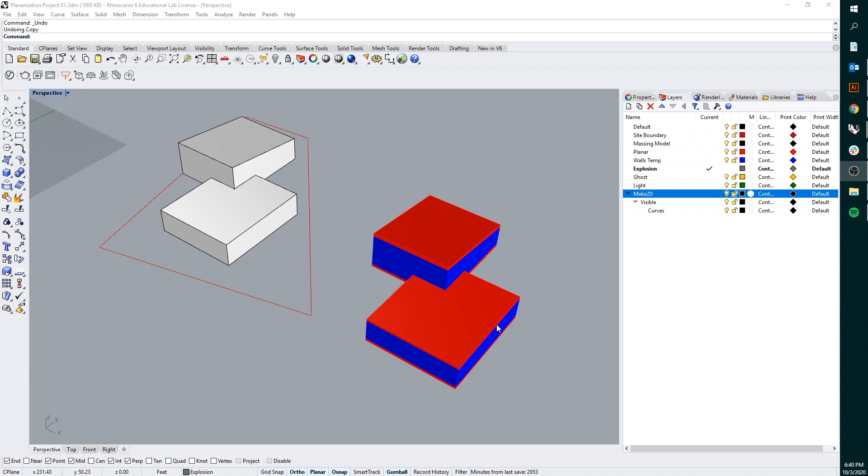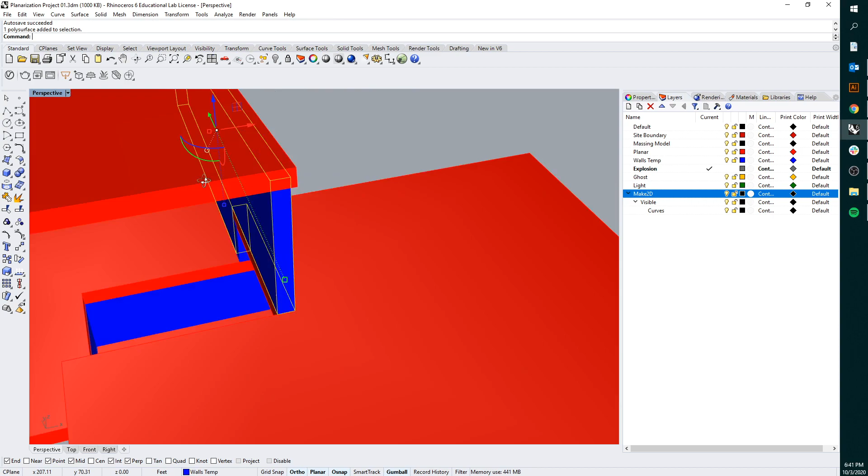The only difference in the model from last tutorial is that I added a little bit of information to clean up the model. This part goes into the digital craft portion of the grading, where if we think about actually constructing a model, we don't want this blue plane to come up to an edge here. We want the red surface to come underneath it to give us something to actually glue to, so I've added that information.

I covered this in the last tutorial as far as how to actually do this, but I've gone through and finished the model here. So I'm going to now work on the exploded axonometric portion.

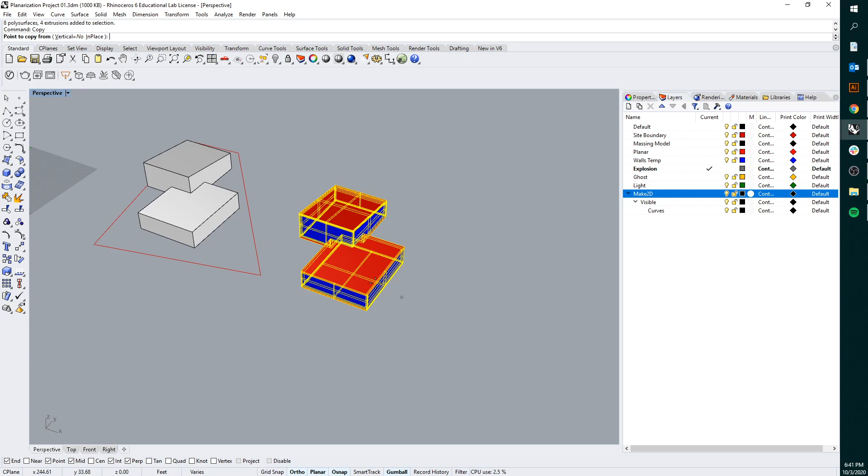The first thing we're going to do is copy our model over so we have one model that's just our massing - we can go ahead and delete the site boundary for now - one model that's our planar model, and one model that's going to be our exploded axonometric model. First we need to take the pieces apart.

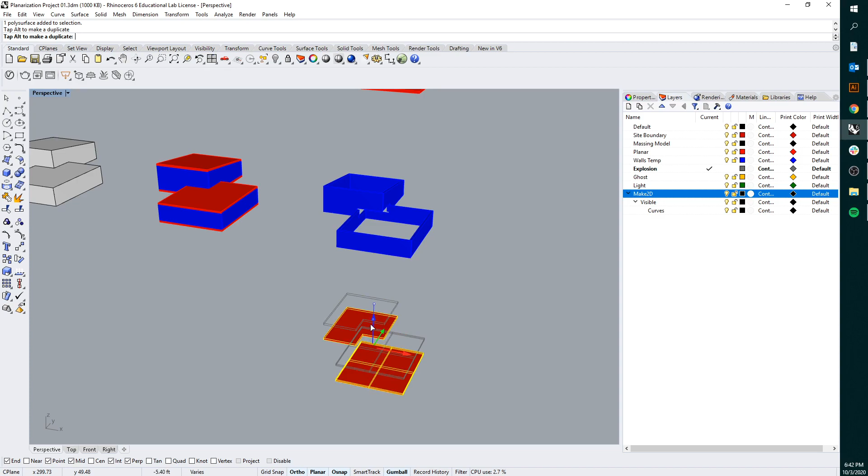I like using the gumball tool here. If you don't have the X, Y, and Z options, go to the bottom of your screen and select gumball, which allows you to move things vertically, horizontally, in the X and Y direction, and the Z direction. Here we're just pulling the pieces apart so they're separate.

Don't worry about how far they actually are from one another for now - we can always move them a little bit more later. I'm just moving out in the direction perpendicular to the face of them for now.

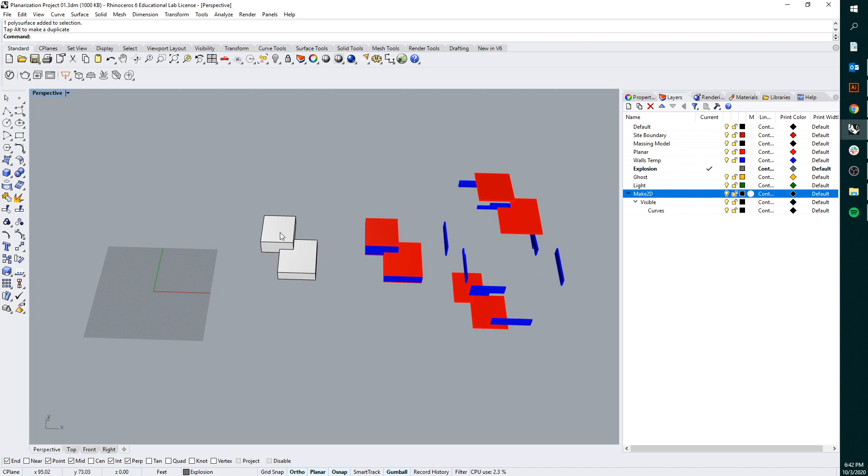Now we're going to think about how we're going to construct this axonometric. If we think about the basics of an axonometric, the first thing we do is rotate the plan, and then draw up from it. So we need to decide which portion of this we want to be the front of our model.

If we look at the front here, and rotate 45 degrees in this direction, this would be the front. If we rotate 45 degrees in this direction, that would be the front. We can also look at back views and things like that.

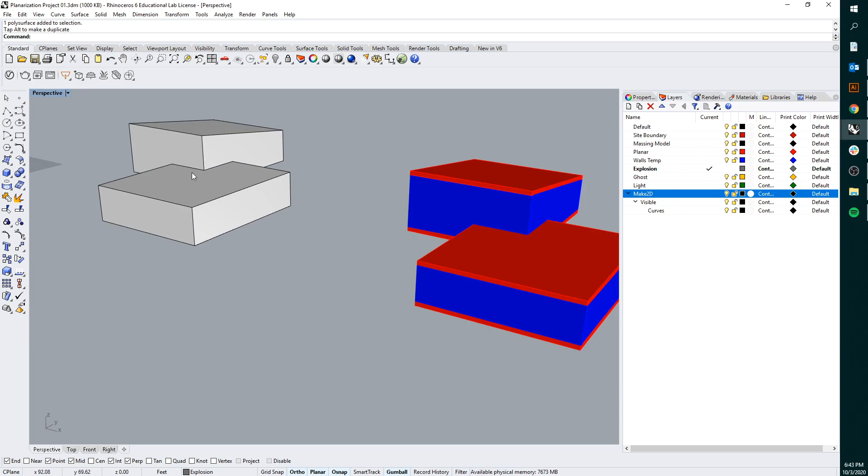I'm going to go ahead and take it from this view - you can take it from whichever view works best for your model. In this case, I think looking up the hill at my model in this direction works the best.

So we're going to go into the top view, and you can either use this part of the gumball or just do a simple rotate. Then you decide whether you're rotating in this direction or in that direction.

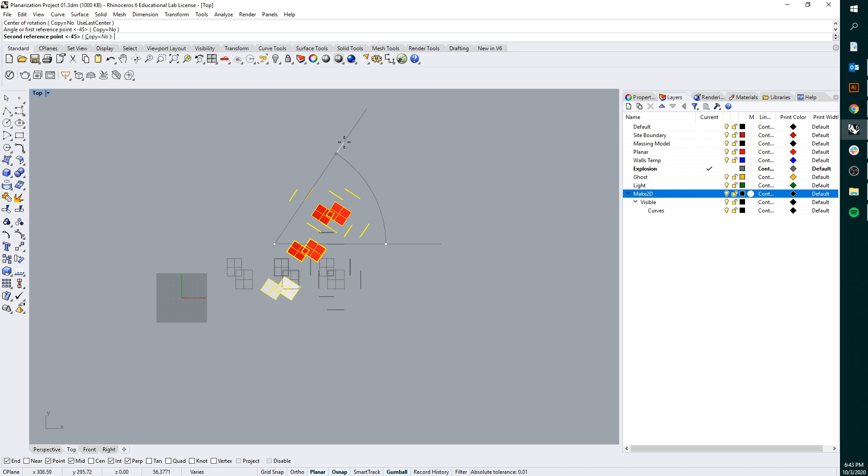Keep in mind that this direction would be a positive rotation, and this direction would be a negative rotation. So I'm going to rotate negative 45.

Whichever direction you choose, you should be using a 45 degree increment, so it should not be something like 60 or 30 - those would reveal different kinds of drawings than what we're working on here.

I'm going to reorganize these pieces a little bit, so we can just grab these pieces and move them around now. They're not really relating to each other, so as long as we're moving them as a group, we should be fine.

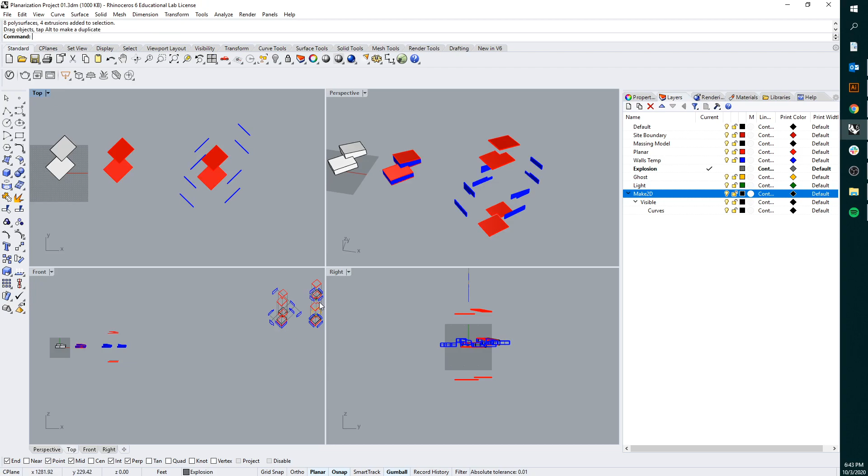Now we're going to look at doing the shear command. This is something we worked on in other axonometrics. If we highlight everything in our top view, we're going to type shear. And then I don't like to try to click a point on the actual model.

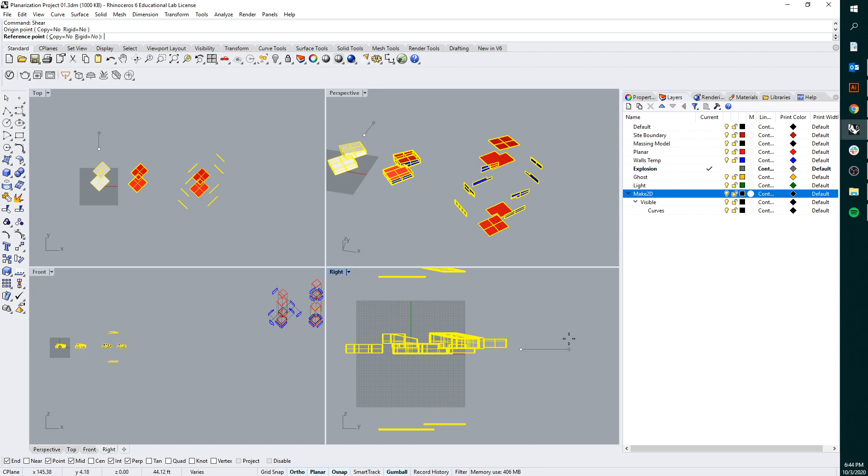I'll click over here, and then either hold shift to make it orthographic or choose the ortho tab at the bottom. We're going to go off to the right and click again, then type 45 and click enter.

If we look in our front view, we can see that we have these all in axonometric view now. You can see that we have pieces actually overlapping each other, so for now I'm just going to make sure nothing is overlapping with another piece. That's really important for the next step.

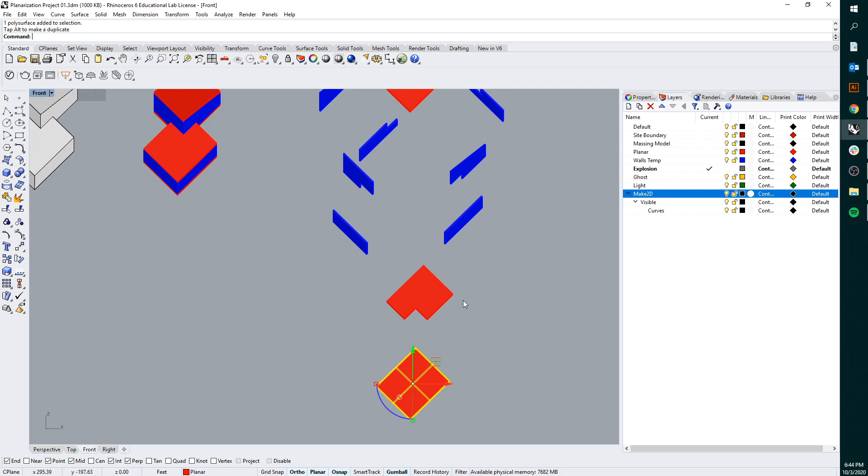So we're just going to go ahead and drag these out. We can move this piece up. They can be pretty far from each other—it doesn't really matter for now, as long as they remain in the same orientation. So we're going to do something like that.

Now we're going to highlight everything we just did the rotate and shear on, and we're going to do a Make 2D. A couple of options here that I'd recommend: you can do either view or C-plane. The main difference is C-plane will keep your drawing in front view, whereas view will bring it into the top viewport. I'm going to leave it in C-plane for now.

For object properties, the option I go to most often is maintain source layers. So if my red is layer 1 and my blue is layer 2, it will make a new layer underneath our Make 2D category that has a layer 1 and a layer 2, so I can really easily turn these on and off.

I would select that one for now, and then we're going to add hidden lines to this Make 2D. You may or may not use them, but I think they're really helpful in this case so we can keep them in there to see basically a wireframe of the entire model. If you want to get rid of them later, that's fine, but if we need them back later, it's really difficult, so I like to always have them, and you can turn them off whenever you want.

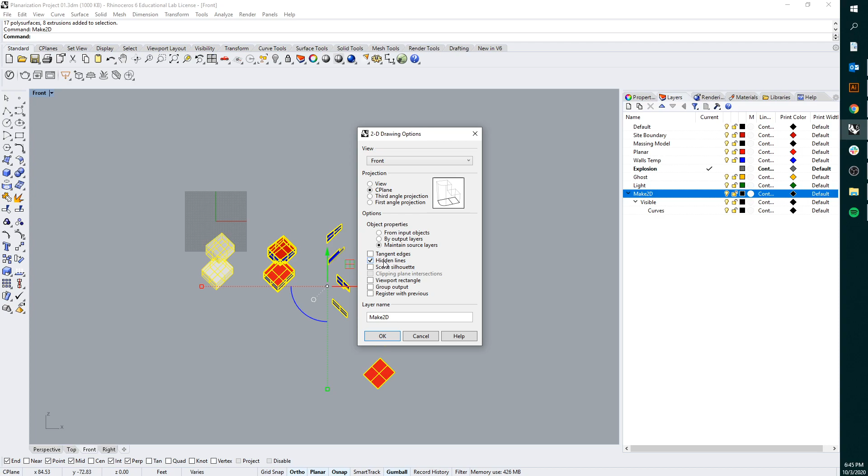By doing this maintain source layers, all of those hidden lines are going to be on their own layers, so they should be really easy to turn on and off. So we'll go ahead and click OK here.

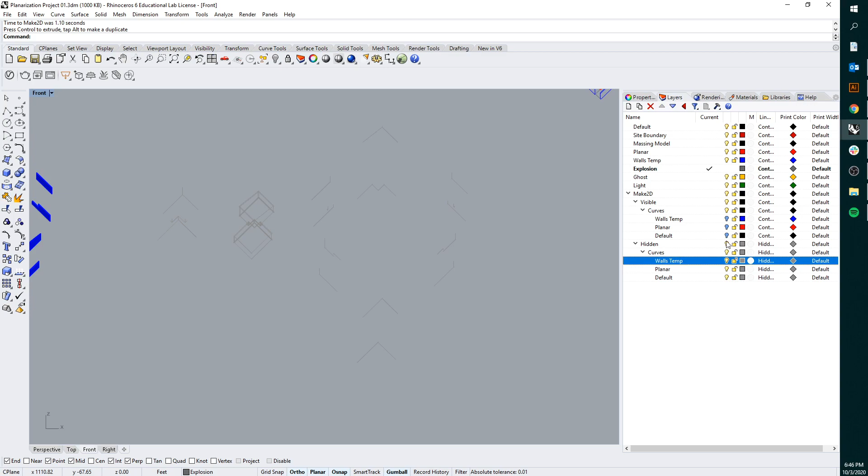You're going to see the generation of all my layers here, and I'm going to just drag off those that I just made 2D. You can see that I have all of my blue on one layer, all of my red on another, black on another, and then my hidden lines are also on individual layers. So I have a lot of control here. I would always err on the side of more layers than less, so you make sure you have everything you need.

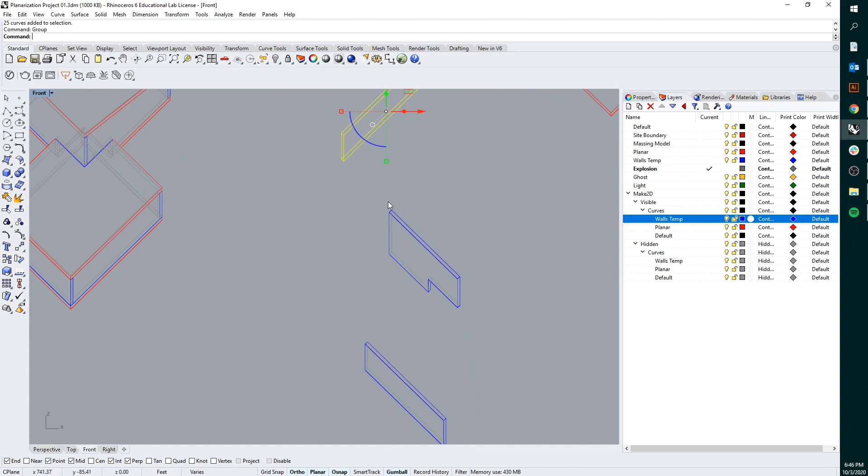So we're going to do a couple of groups for now. I'm going to group this together, and I'm going to group this together. Then I'm going to go in and just group each of these pieces individually so we can move them really easily—make sure you don't grab parts of other ones.

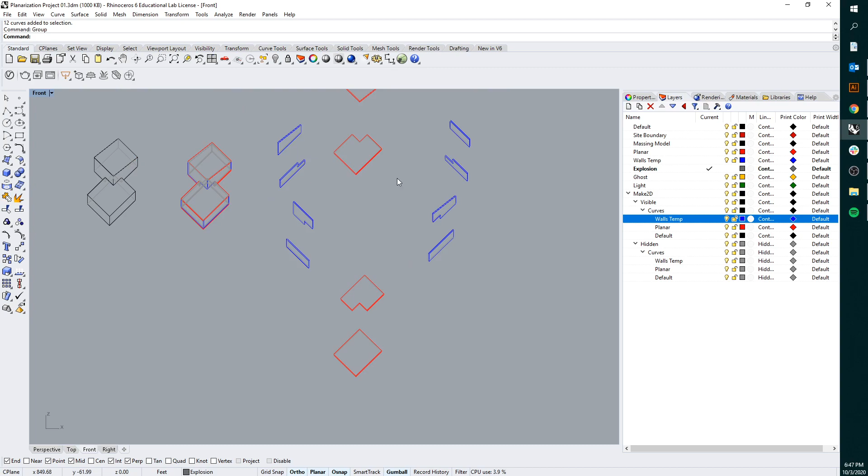The grouping won't affect what layer everything is on. Just make sure your layers are on when you're moving these around.

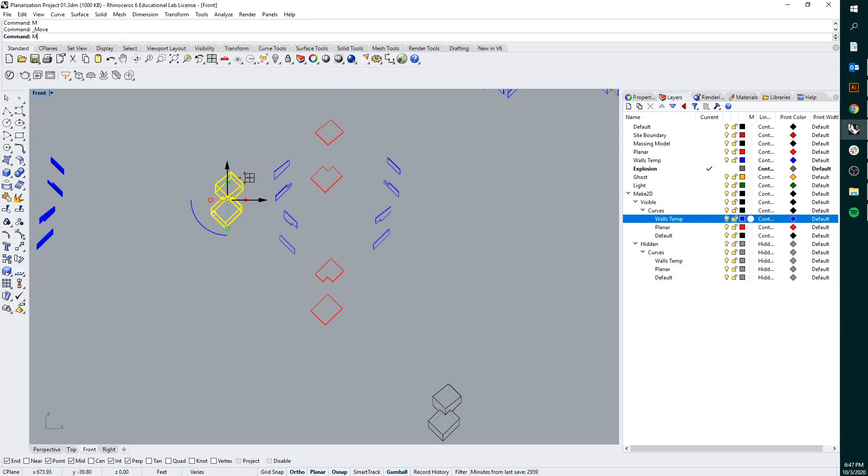So what I like to do for the sake of my model is, the first thing I'm going to do is start with the middle of my drawing being my actual massing model. I'm going to leave this as a massing model, and then start adding information and exploding out from that. If I move this, I know from how I constructed it that I can grab from that corner and move it all the way over there.

Now we're actually just going to hide the default layer one, so that's going to be our original massing model, so that we can do a little bit of work on the axonometric.

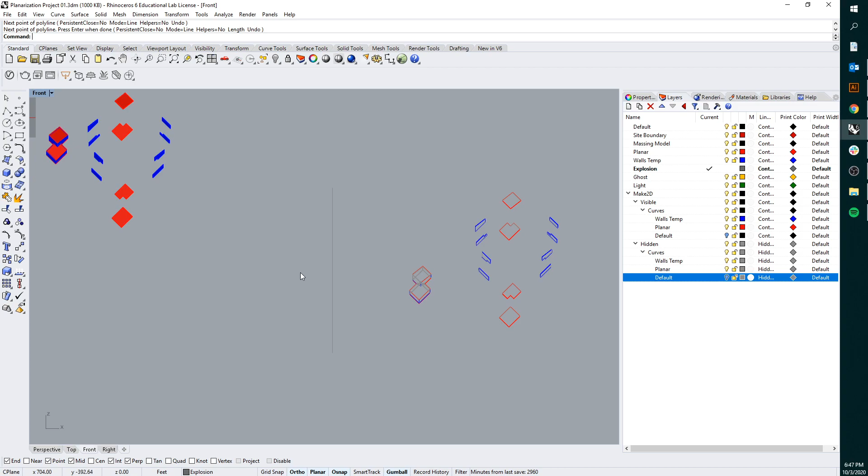So you can see that I've already started a couple of different versions of this up here, but we're going to go through the process of how you would now make this into an exploded type of drawing. So a couple of rules first with axos. What we want to do is make sure that everything is either a vertical line or it's going to be at a 45.

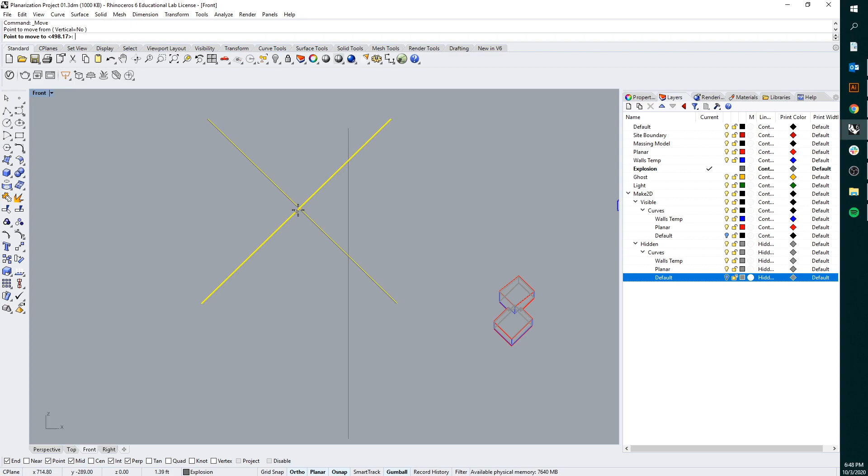So what we want to do here is rotate this, and then we can mirror it. So everything that I'm drawing is either going to go off in a 45 in this direction, a 45 in that direction, or a vertical line here.

So you can be a little bit creative here. We don't necessarily just need to explode, say, this wall out in that direction. We could explode it out, and then we could move it up if we wanted to. So there's a couple of different options here. It doesn't have to just be a straight explosion.

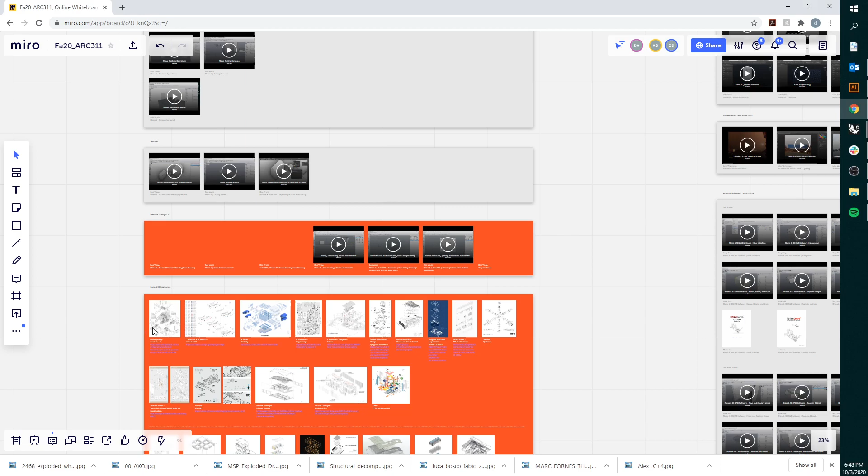So if we look at a couple of examples to talk that through, we have an example like this from a firm called The Very Many. So they're exploding everything out in 45. It looks like they're not working at a 45-degree axo here, but they're exploding it all out at the same angle in this direction and at an opposite angle in this direction.

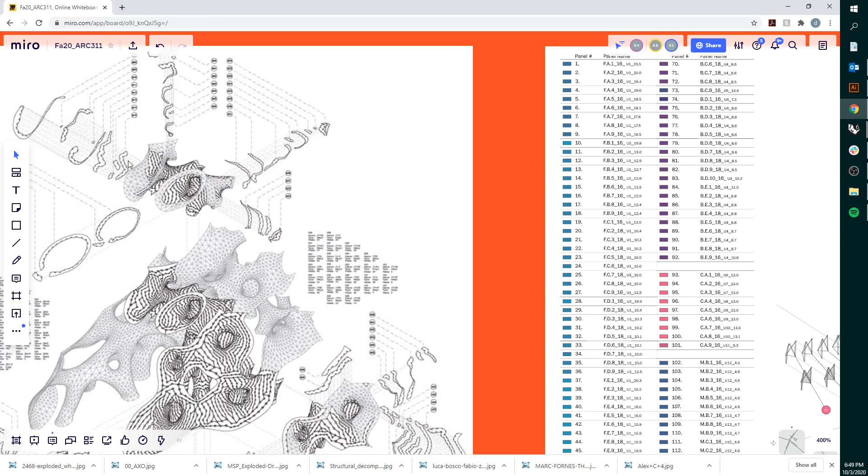But then they're using a sort of a convention for their labeling that actually uses vertical lines, in conjunction with basically this direction and that direction. So here we have a direction coming down like that and then back up to create our labels. So the convention that they're using here is that every single line is either a vertical line, one of this direction, or one of that direction.

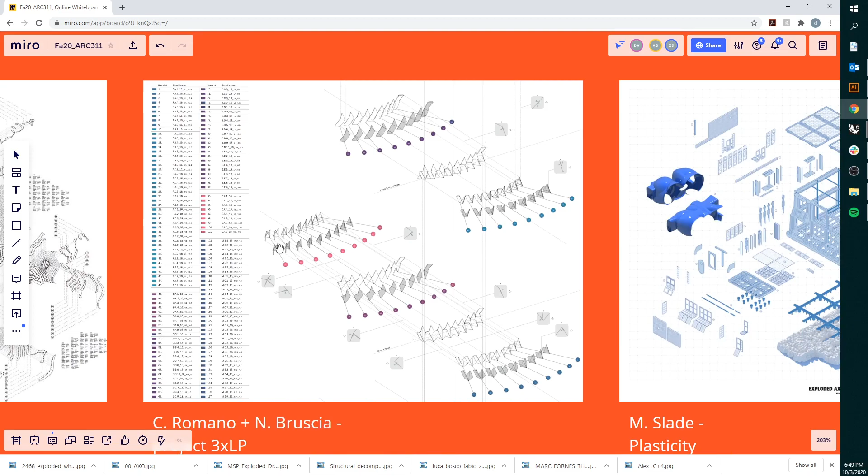Here what we're looking at is a more radial type of explosion, so this is a little bit different. You would only use this if you're really doing something that's already circular. And then looking into other kinds, here we have a more vertical where you're exploding off in floors. Here is more of a perspective type of explosion, so we won't really be getting into this, but I like some of the graphics here.

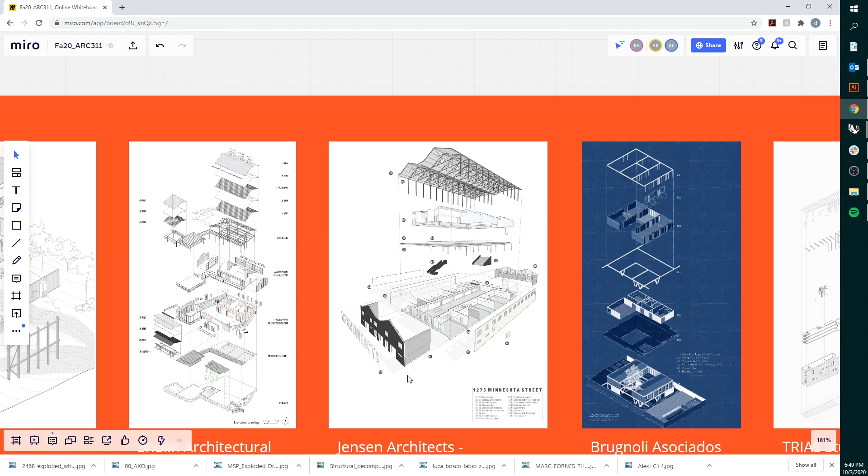And then again, vertical. So you can see that they're using the same sort of principles that we're describing here. It should be a really simple type of drawing. This creates a nice little rule set for you where you can really only draw in those directions.

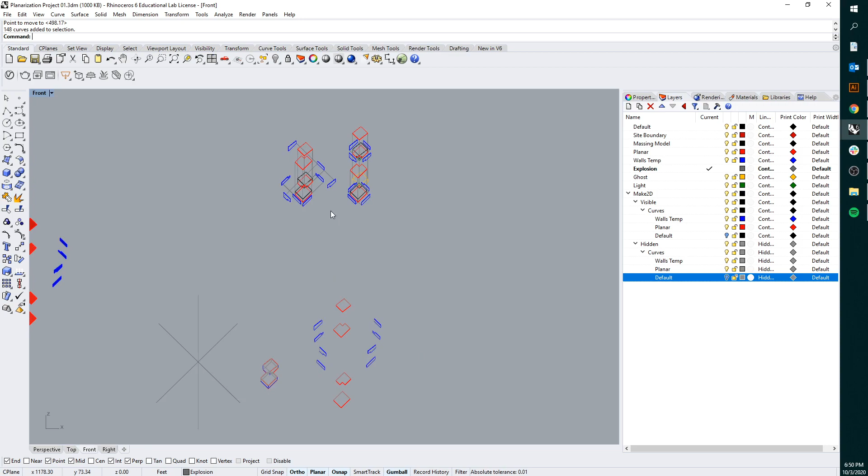Another would be that we have one volume, and then we have our massing model ghost here, and then we pull the second volume up as a whole volume, and then we do two different exploded drawings on top of each other. So there's a couple of different options there. You can also drag one volume out, and you can then start to explode that up and out.

There's a bunch of different things you can do here compositionally to make sure that you're doing justice to the final drawing. In my opinion, something like this gets really messy and really confusing, whereas this actually breaks down the modules and begins to understand what your floor, your four walls, and your roof looks like for each module, while still gaining an understanding of what the whole looks like.

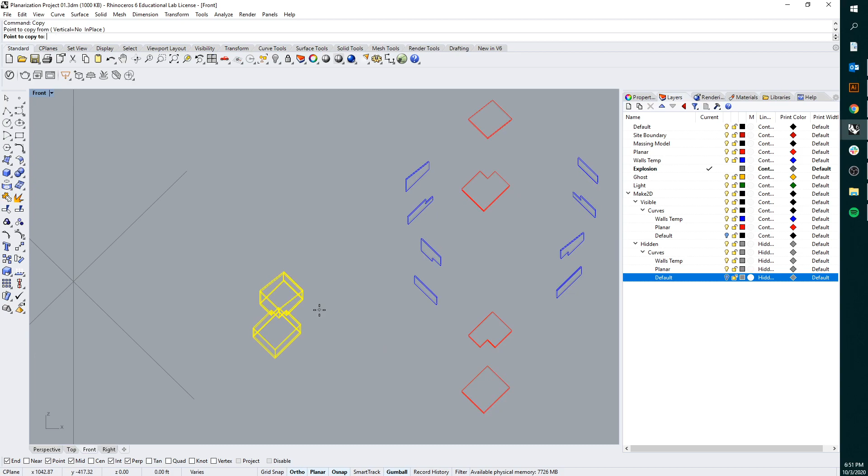So this takes a little bit of experimentation. It's probably not something that you're going to nail the first time, and that's totally fine. So here, let's take a look. If we just copy this out, I'm going to act like I'm doing both of the different volumes here. So what I'm going to do is I'll just realign this really quick,

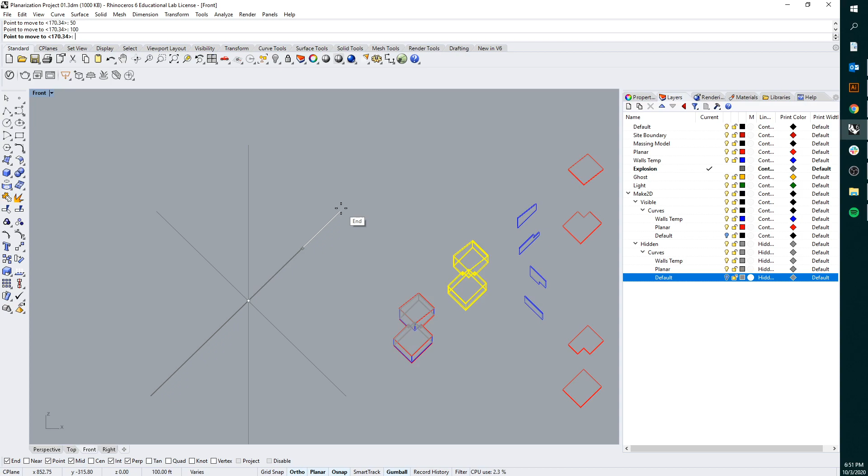and then we're going to do a move, and we're going to look at moving this off at a 45. So you can move that off by a certain amount, or if we click here, you can actually start typing numbers. So 20 isn't long enough, 50 isn't long enough, 100 looks pretty good, so we can have something like that. And then we can start to draw our actual explosion lines in here.

So I have a layer that I've already called explosion. So then you can start actually pulling lines here that call out where you're actually pulling this model to.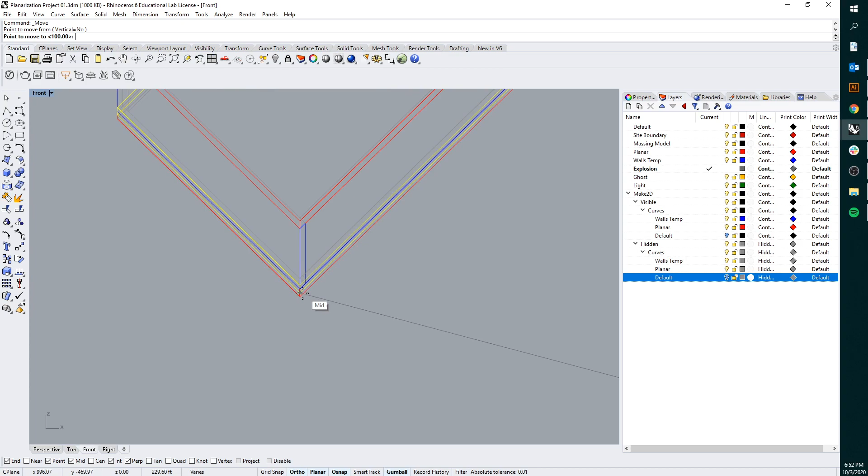And then what we're going to want to do is start actually putting the pieces back onto this. So here I have the floor for my first volume, so I'm going to do a move, and I can reorient that. And now because I have a couple of different options here, I could slide this out that direction, I could slide it out that direction, but here I'm going to look at doing just a move. So I'll just move that vertically along that line.

And now I'm going to reconnect back to my model using some guidelines here. So these will eventually become dotted lines or very light colored lines when you go to print this. So that shows that that piece was actually pulled down. Again, depending on how much of a wireframe you're doing here, you could actually get into doing something like that where you're pulling off all four corners. I don't think it's totally necessary to do all of the corners of all of your pieces. But that's something that I'll leave mostly up to you guys.

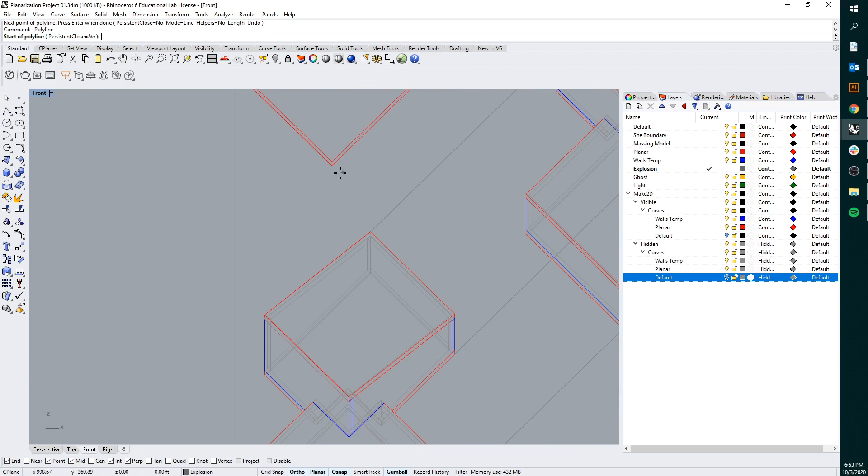Here we can go ahead and take the roof. So what we're doing here is basically reassembling this model with its individual pieces. And the reason that we needed them to be individual pieces was so that we can move them around at will here. You can imagine if we took this piece off of here, we could do it, but it would require a lot more trimming and a lot more getting rid of lines that are in the background. So I like doing it this way, where you have basically a working model that's all of your different pieces, and then you can really easily realign to that. So again, here we'll pull some explosion lines up.

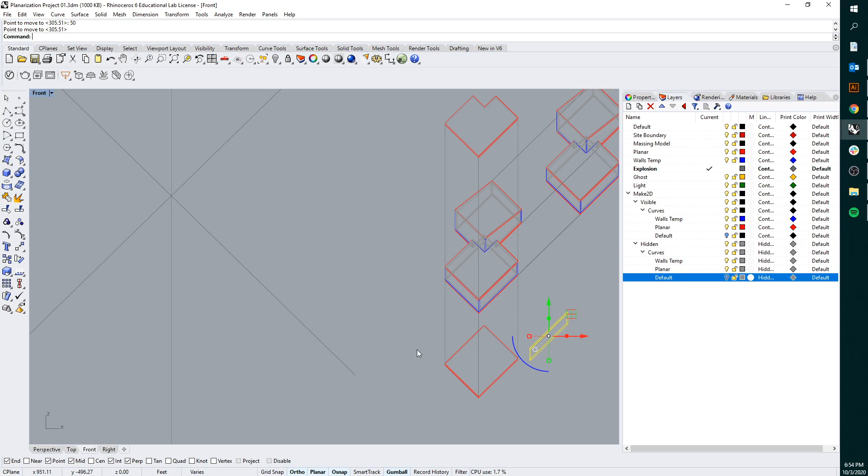And then we have a couple of walls that we need to put on, so we'll go ahead and take our first wall. Now this one, what I would probably do is a move, and then we'll go off of our 45, and let's see what 20 looks like. So 20 looks like that. Compositionally, I think maybe we want it to sit a little bit more outside of this. So what we can do is look at something like 50, and then compositionally that starts to look a little bit better, where it actually looks like this wall might sit on the outside of that.

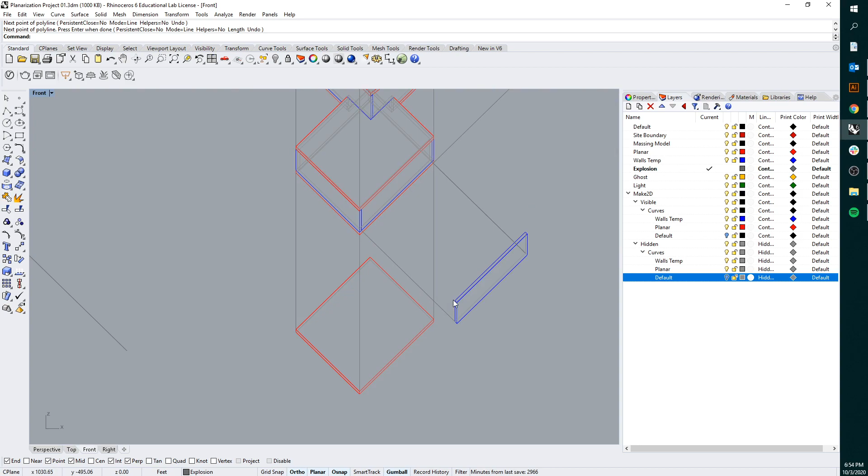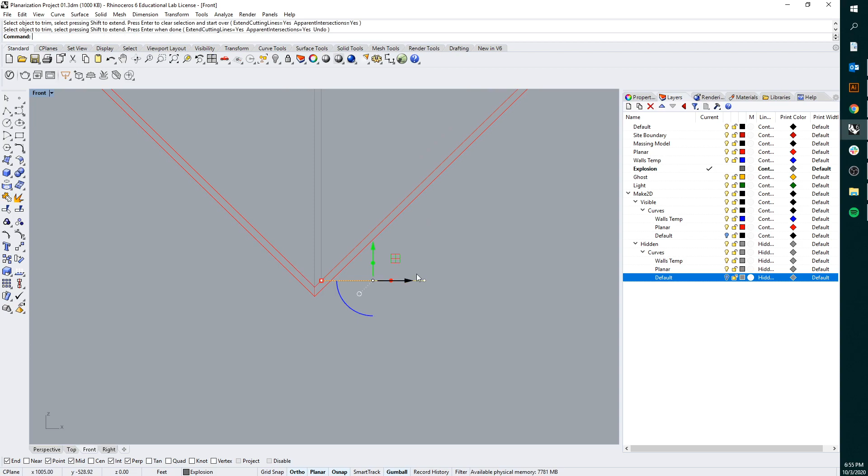So we'll grab a line here, and this will be our explosion line. So it'll come down like that. It'll come to that corner. And then you can actually start linking these back to each other. So if we think about the way that this would actually align to this piece, you could start to think about a way of calling out that this is the sort of point where that actually intersects. So if we trim that out, we can start doing things here where we call out that this point,

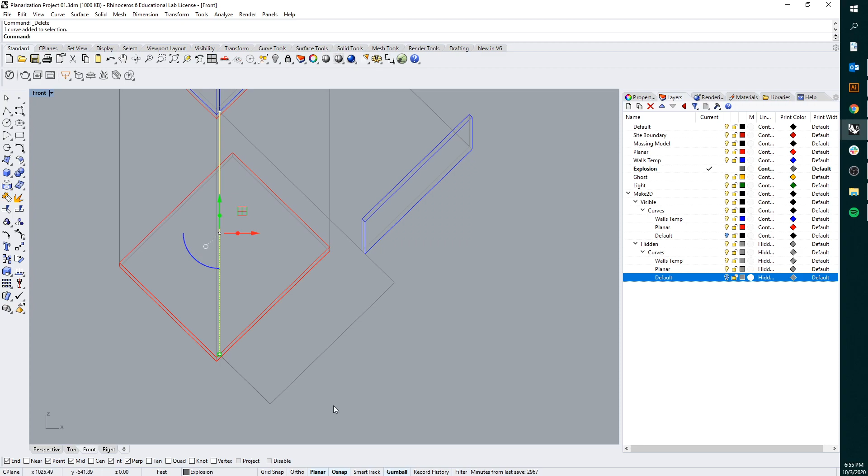let's see, if we copy a line here, and then we copy this line, and then we do an extend. So you can see how we can also start to create relationships like this, and maybe we have to split this here. So if we do a split, maybe what we would look at is making this line a different color or something, since this is more of a diagram of how those pieces actually align.

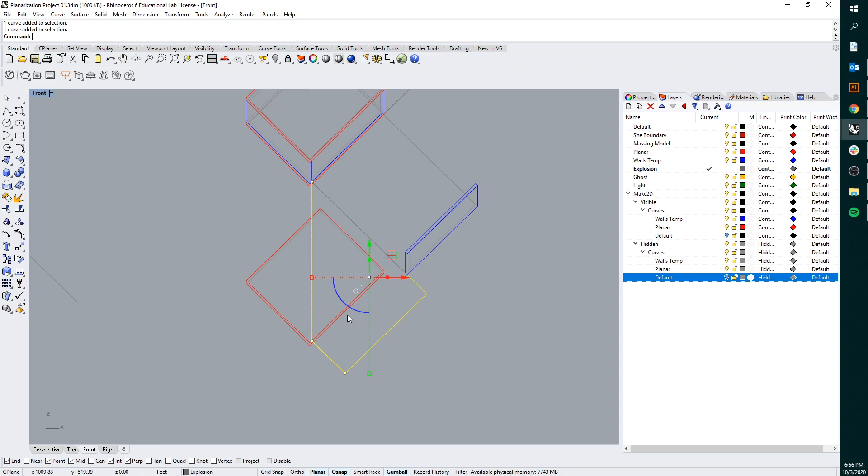This isn't a totally necessary step to an exploded axo, but it can start to add a lot of information as to how you're thinking of aligning different pieces. Another thing we could look at doing would be, let's say we were to trace the bottom portion of this. Whoops.

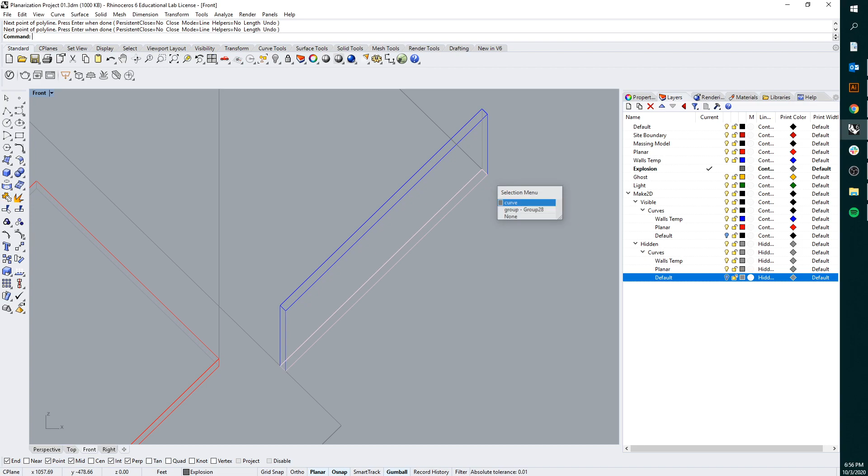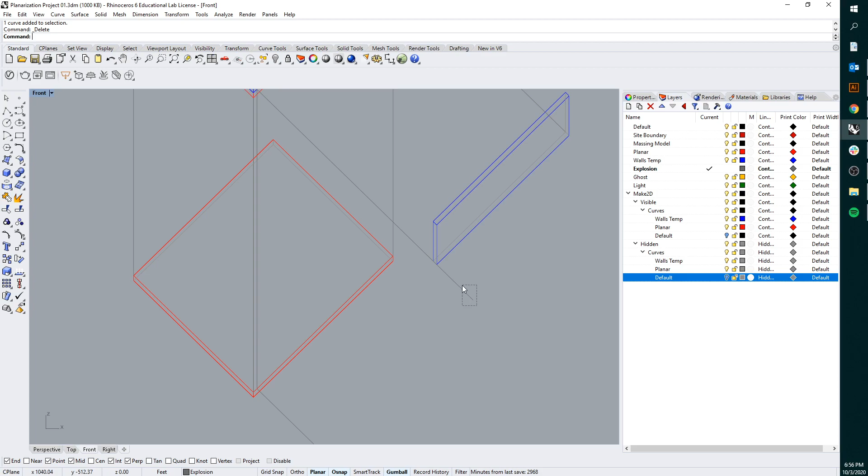So we have a curve there. And then if we look at actually moving that, you can create a sort of ghosted line here, and then you could show how that then relates to this piece. So you can show that the bottom of that piece actually starts to align there. So there's a lot of different options you can do for showing different alignments within the axo. It doesn't just have to be these simple explosion lines.

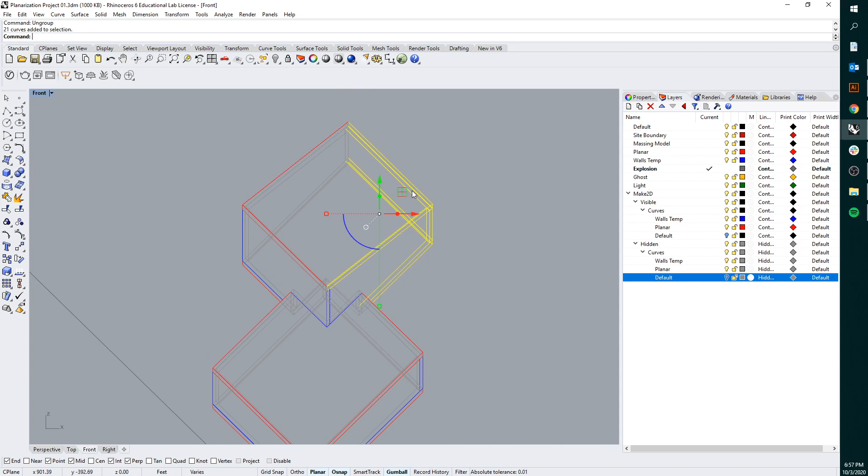And then you can get into actually what you would be showing here. So maybe for this one, the only thing that I want to show is this base module. So what I can do is, instead of doing the whole thing, I'll ungroup this, and then we're gonna just get rid of everything that has to do with that second volume. And this gets a little bit confusing here. So you can start to water down the amount of lines that you actually have here, so that you can only see certain portions of it.

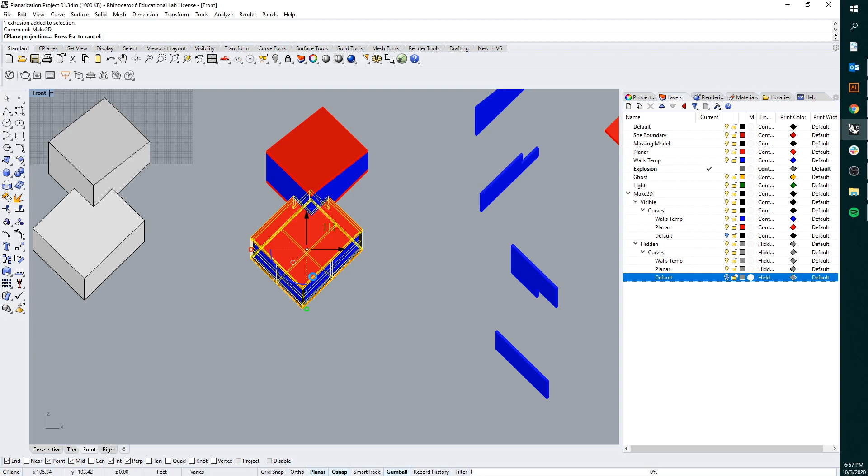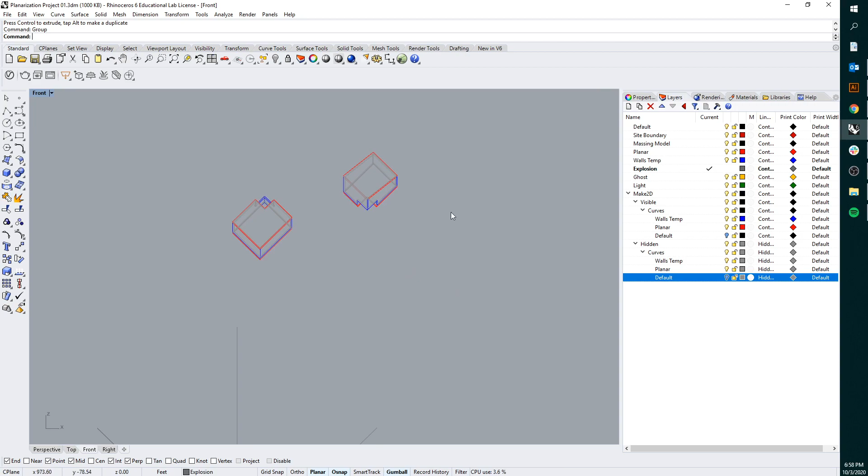Another thing you can do is if this part of it gets really confusing, we can say let's just delete that. And then instead of doing that, let's go back to our original axo here, and we can just choose those pieces. And then if we do another make 2D here, what that will allow us to do is we can group this. And then let's do that again for this piece, and we'll do a make 2D here. And we can group this. And by doing that, we've broken out our two pieces. So by actually keeping the 3D information here, you allow yourself a lot more flexibility.

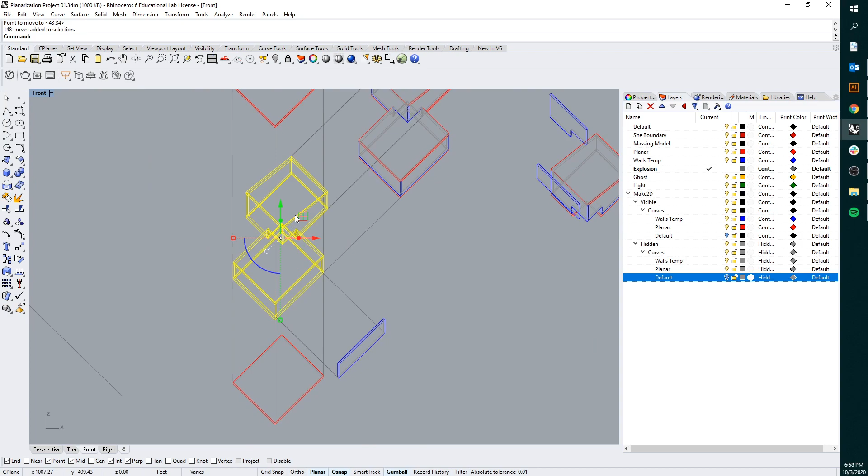And now the reason that I'm actually going in and doing that is one of these I'm using to show this volume. So I'm going to move that back there. And then we can actually delete this. And then for this one, really what I'm showing is this volume. So I can move that to there and delete this guy. And then that'll get rid of a good amount of information there that you don't actually need.

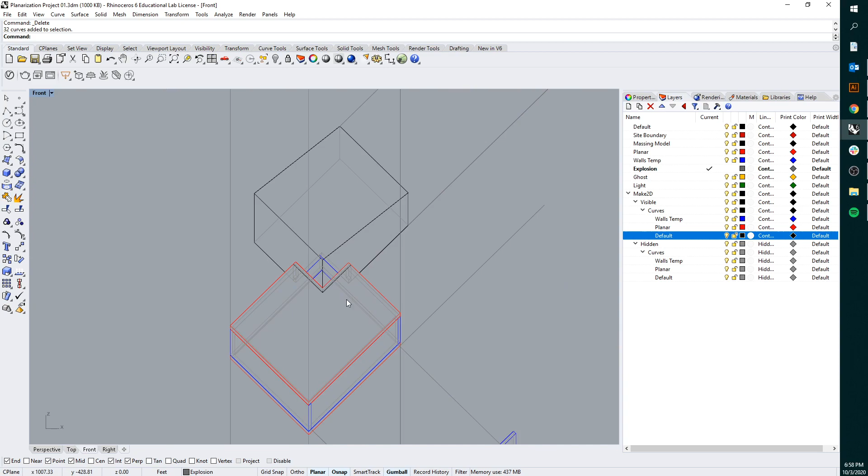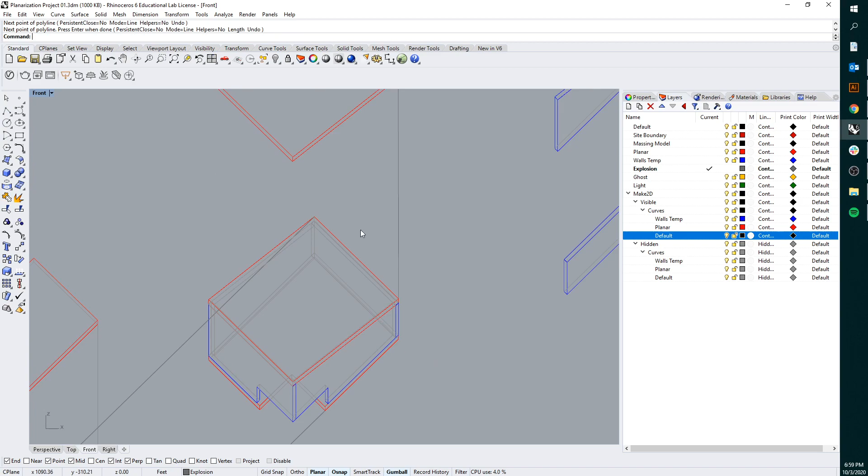So then what I wanted to do is, my base massing model is here. Then I show more detail as I'm getting into the planarization of this first volume. I explode out a volume here, and then I can do the same process here. So if I move this over to here, then I can project that up like that. Again, drawing out my explosion lines here. So it would look something like that. And then you would continue doing the same exact thing for adding your floor plate under there. And then you would continue adding all of your walls and pieces into here. So that's the basic construction of them.

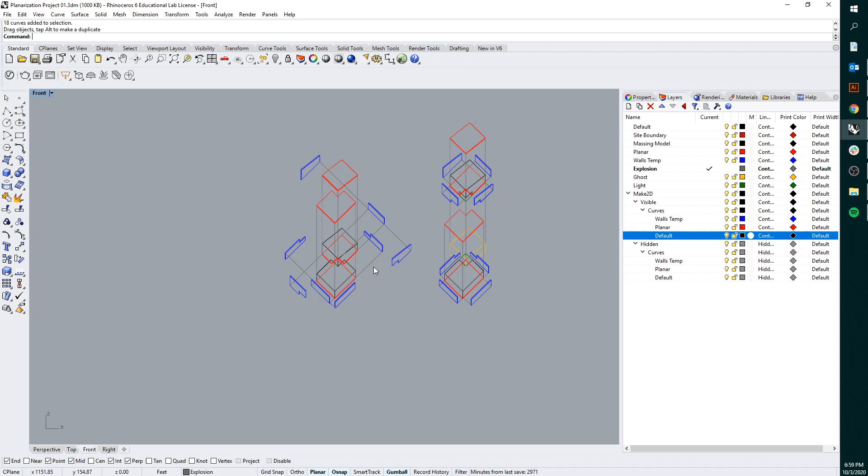Obviously there's no right or wrong way to do this. What you want to keep in mind basically is this organization of your different lines. Keep all of these things grouped, keep them all on separate layers, allow yourself the most flexibility that you possibly can so that you can add or delete things pretty much at will.

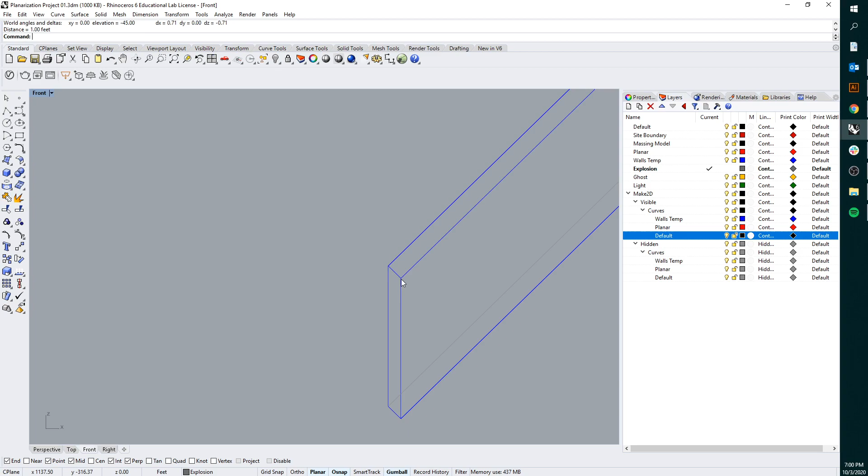So what we're going to look at here is one last thing that's just going to talk about scale. So how do we know that this axo actually worked? So if we go to one of our pieces, let's go here, and we type distance. This line should actually represent the thickness that we made all of our walls. So if we do distance here, we can see that it is indeed 1 foot. So you can do a test on a couple of different pieces here just to make sure that they're all at the right scale, and it looks like they are. So the thing about an axo is that all of your dimensions should be true dimensions. So check anything that's an orthographic dimension, and that should be correct.

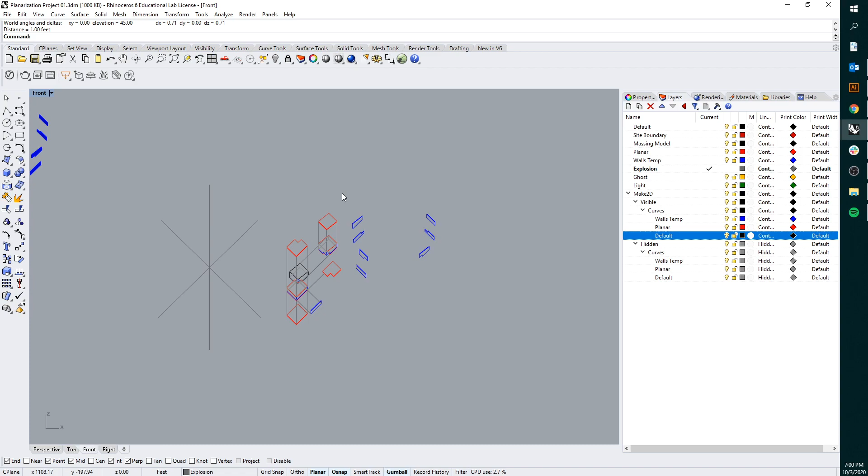The last thing is, how do we know what scale this is going to be when we either go to print it, or if we bring it into AutoCAD, or if we bring it into AutoCAD and then Illustrator? So what I like to do here is actually draw a rectangle that is going to register the 8.5 by 11 piece of paper that you're actually going to be putting this on. So 11 inches tall, and this is going to look really tiny, and then 8.5 inches wide.

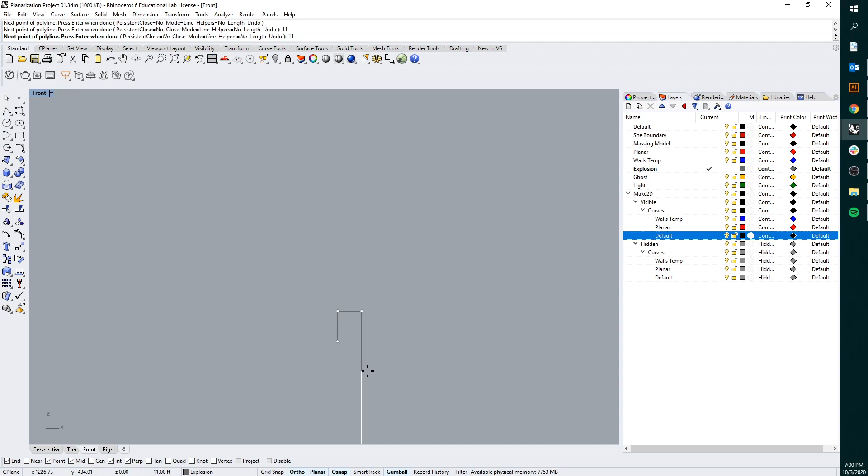Okay, so that's going to register my little 8.5 by 11 piece of paper. Now, what I wouldn't recommend doing is scaling this down into that piece of paper, but we can think about this piece of paper at a larger scale. So if we think about this, this is 1-to-1 to my actual piece of paper. But what if I scale this up by 12? So if I type scale, then click that, and then type 12.

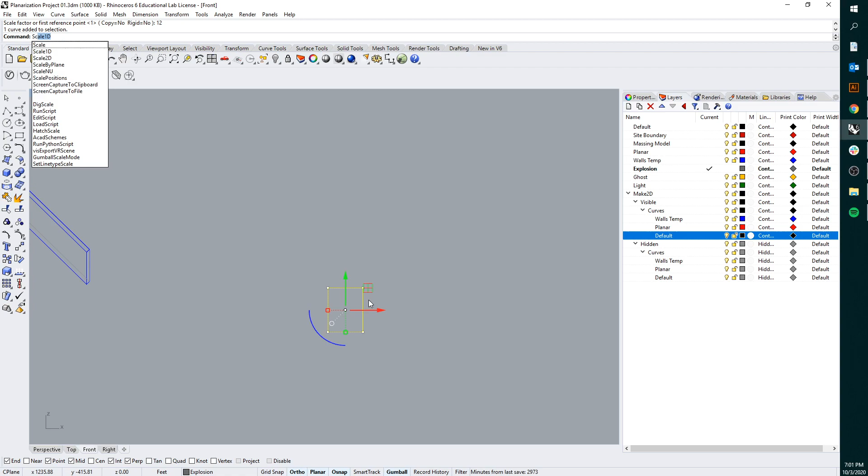So this piece of paper is now basically registering what this drawing would look like at 1 inch equals a foot. And the reason that is because we've scaled it up from 1 inch at scale to 1 foot by multiplying it by 12. Now, if we look at trying to figure out what scale we can actually make this at, from here, it's fairly easy. So we can scale this up. So if we just type scale, we can look at actually making this.

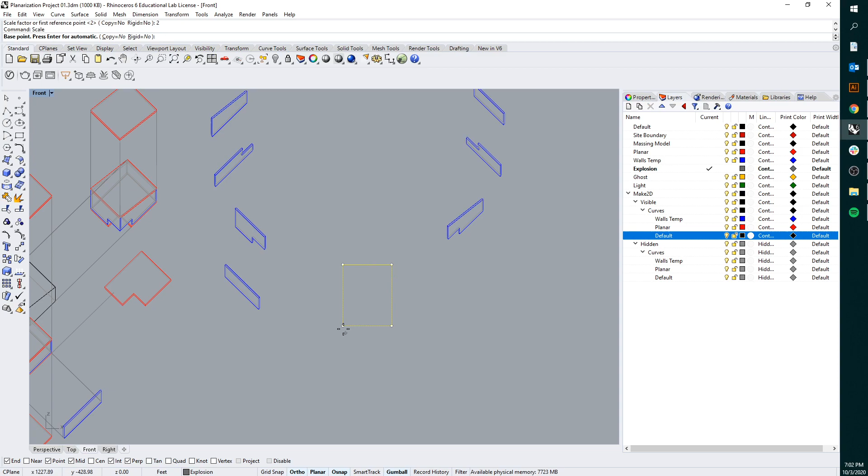So let's say we scale this up by 2. So that would then be at 6 inch. So that would be at ½ inch equals a foot. If we scale it up again by 2, it would be at 1/4 inch equals a foot. 1/8 inch equals a foot. Scale it by 2 again would be at 1/16 of an inch equals a foot. And then if we scale it again, we're going to be looking at 1/32 of an inch equals a foot scale roughly.

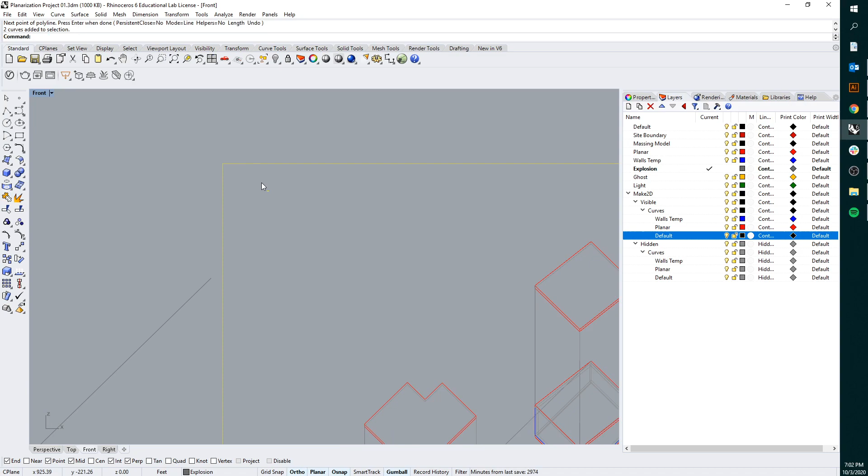And so now if we want to check this and check our math here, what we can do is we can draw a line that registers 1 foot long. And then if we scale this, so type scale, and if we go from this corner to that corner, and then we type 1/32 of an inch. So now when we do a distance here, we should be back at 0.71 feet, which if we convert 0.71 feet, that should be 8.5 inches. So if we did 8.5 divided by 12, that would be 0.71 feet. So we can see that we're actually at the right scale here.

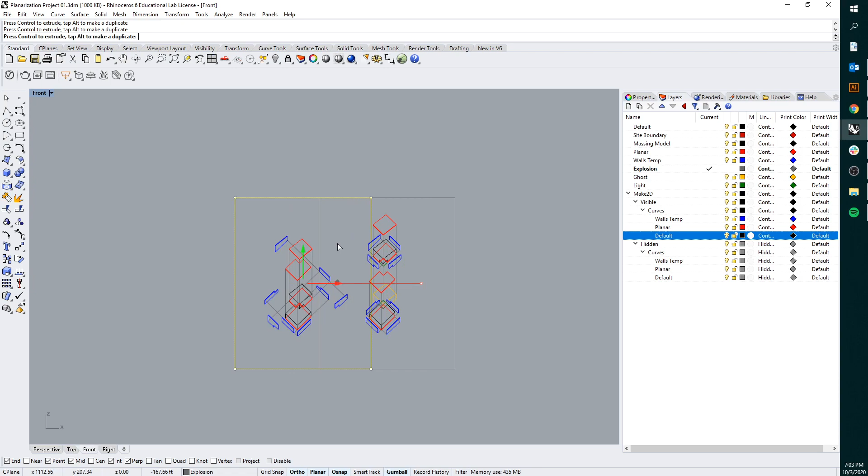So basically what I'm telling you here is that you're looking at probably having your model at 1/32 of an inch equals a foot, depending on what type of organization you're doing. And then try to fill out that page pretty well. So I wouldn't go at a weird scale in between 16th and 32nd. I would keep it probably at 16th or 32nd or 64th, depending on what you're working with. So from here, you're going to then export this into the program of your choice, or you can plot straight from Rhino, adding a couple of different graphic properties.

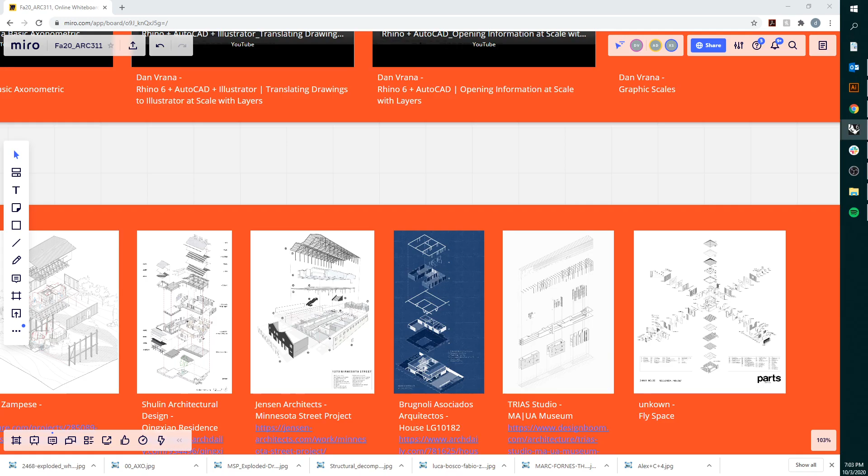I will be posting more examples of what a drawing like this could end up looking like. I'm going to take the same base drawing and then add different effects to it to show how they could end up looking. I've also included on our Miro board a bunch of different pieces of inspiration, but feel free to look at your precedent boards for different ways of, not just Axos, but different ways of coloring drawings and things like that. And look out for more tutorials on how to incorporate graphic scales. I'm going to be adding a bunch of Illustrator and Rhino and AutoCAD tutorials about graphics in the coming weeks before this assignment is due. So please take a look at those and start to incorporate those into your drawings as well.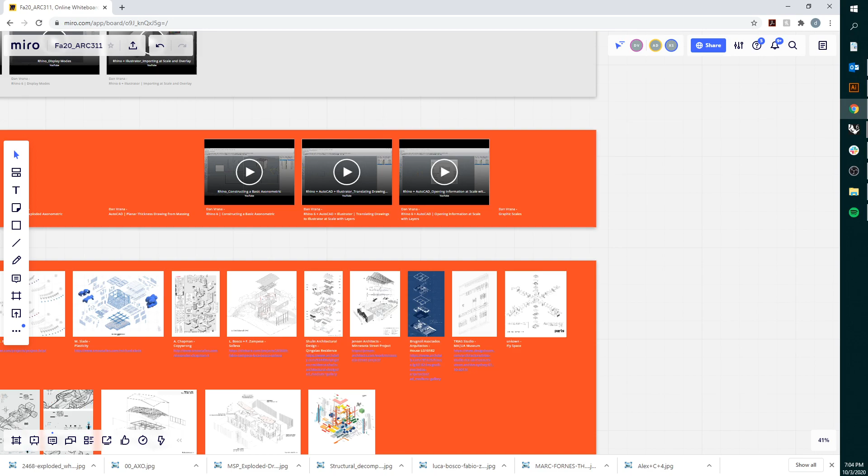I've once again brought these 2 tutorials to the forefront, how to basically import at a scale. So once you have this drawing all set up in Rhino or in AutoCAD, you can then import it into Illustrator if you'd like, and these 2 should help you actually to import that at scale. The last thing about this little method of actually scaling the 8.5 by 11 piece of paper is that this is a really good way of double checking that your scaling worked once you go into Illustrator, because this page will actually fit perfectly the boundary of the 8.5 by 11, so you can be sure that you're at the correct scale.

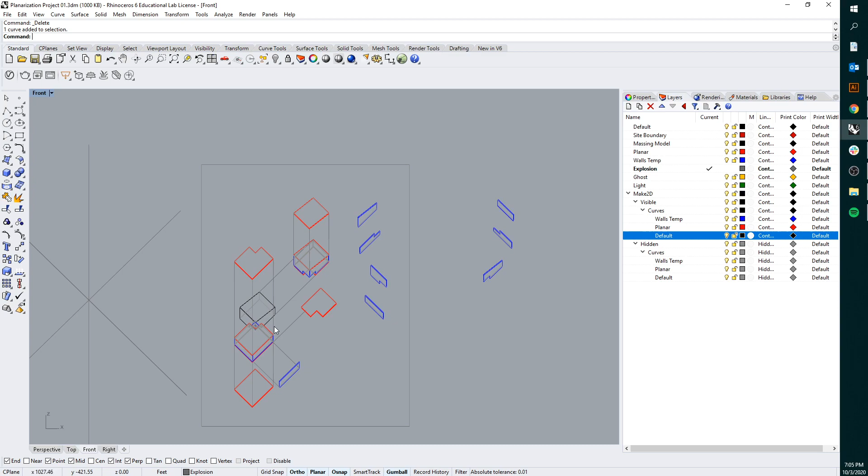So keep an eye out for those other tutorials, and in the meantime, let me know if you need any assistance with this. Keep in mind that there is really no right answer. This is basically a shuffling around process to see how clearly you can make this drawing register a certain assembly process and a certain graphic style.